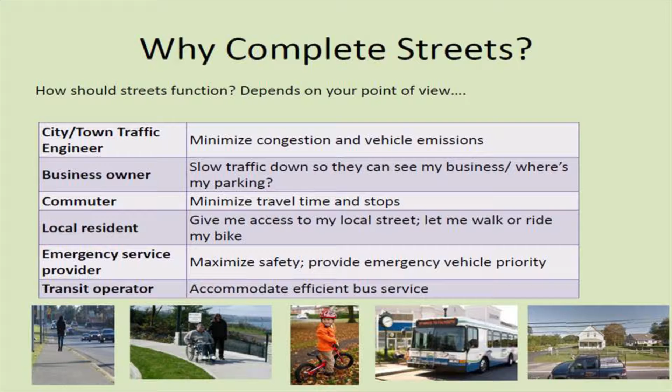We talked about shading and trying to help some residents close to the corridor. If you're a resident on Route 28, you probably want some buffering from the road. If you're a business, you probably don't want that, because you want folks to see your business, know where it is, and come and frequent it. So different users of the right-of-way have different points of view as to what the best use is.

So for pedestrians, we looked at the multimodal paths. We looked at existing sidewalks. Some of you were at the previous hearings where I mentioned that when we had a problem in Teaticket a number of years ago, we went to have the state fix the sidewalk, and they said it's not our responsibility anymore. We said, well, why is that?

Well, because the selectmen way back, when the state said they would build sidewalks from Davis Straits towards the Mashpee town line, assumed responsibility and ownership of the sidewalks. Unusual, but the 3-member full-time Board of Selectmen at the time said, bring the sidewalks, we'll take care of them from here on out. Going forward, we're hoping to look at that relationship with the state as well, to see what the future operation and maintenance of these sidewalks or multimodal paths will be as they're developed and put into place.

For pedestrians, high traffic volumes and speeds intimidate some users. If folks don't feel safe walking down the corridor, they won't walk - they'll find other ways to get from point A to B. Heavy traffic intersections can result in high delays to cross. We've got a couple of big intersections within this area, most notably at the Maravista extension.

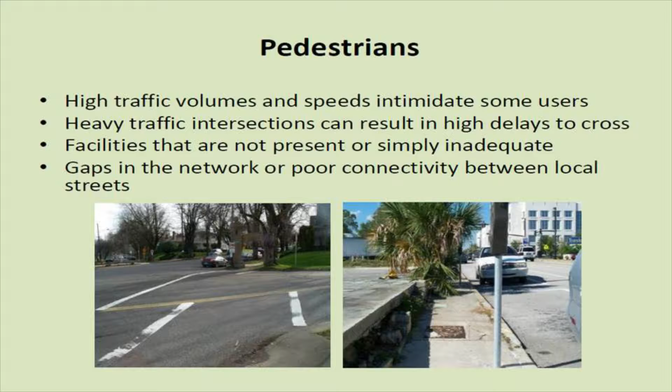Looking at the curb cuts there, for those who have been to that intersection and actually looked at it, when you come in there's one general curb cut for pedestrians coming in two different directions to the corner. If you look at all our other intersections already upgraded in the corridor, we have a curb cut when you're coming from the east and a curb cut when you're coming from the north. For pedestrians on foot trying to make it into the crosswalk, or those in a wheelchair or pushing a stroller, having directional access directly from the sidewalk into the crosswalk is important. So those types of minor upgrades at the corners are important as we look at the intersections going forward.

Gaps in the network, or poor connectivity between local streets - you'll see how this plays out later when we talk about the design. We looked at how this corridor the committee was examining plays into the larger transportation network in East Falmouth and Falmouth as a whole. There's a lot of connectivity points on the south side of Route 28 that bring folks into the 28 corridor and then bring them either to the center of the village or out towards the East Falmouth village.

Not so many connections on the north. There's a lot of residents and businesses, a couple of small developments, but these main connectors of the network are something we had to be cognizant of, and need to continue to be cognizant of moving forward, if we're not looking at this as just a small portion of East Falmouth, but really as a connector piece for all of East Falmouth moving into the center of town.

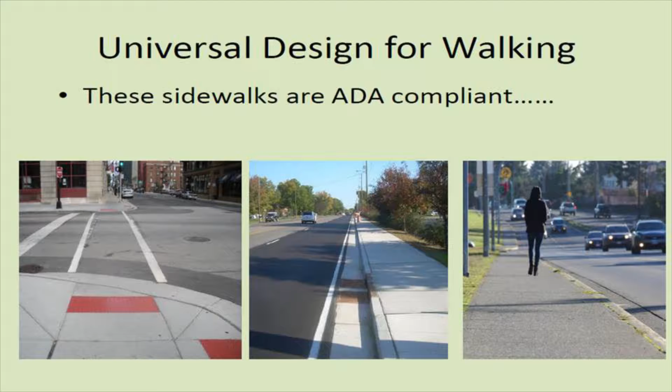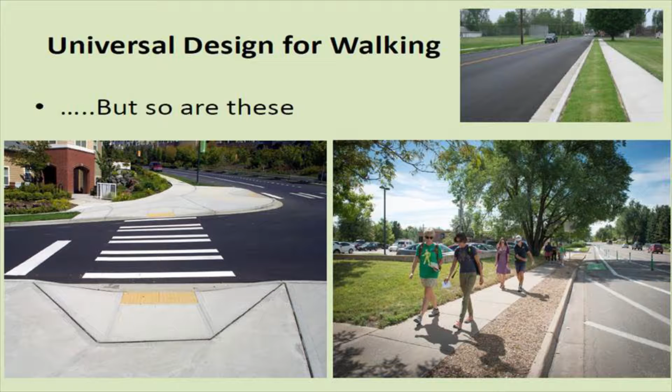On the far right here, compliant sidewalks but with buffer. So when large trucks or vehicles are moving fast down the corridor, pedestrians are more comfortable, particularly young children and folks that might have some mobility issues, being separated and not being directly on the curb of the Route 28 corridor.

So while they're both compliant, what's the better design? Alison, do you want to take over? Sure. So just a little bit of background about why separated lanes, in addition to what Dave just talked about for pedestrians. When you look at some statistics about biking in Massachusetts, 52% of all trips are less than 3 miles, which many people could manage on a bike.

But only 2% of those trips are actually taken by bike. So why is that? Well, among suburban Massachusetts residents, 50% would like to walk or bike to work, but only 1% are comfortable biking with traffic on the road. So there's a big gap between the potential to take cars off the road and turn them into bikes or pedestrians, and the number of people who are actually comfortable doing that under existing conditions.

And among the 50% that would like to bike, only 7%, not that big a jump, are comfortable on a non-separated lane, basically a fog line that gives them a little space at the side of a road but they're still sharing that road with traffic, versus 60% being comfortable on a separated path. So you can see the potential, if we take the bikes and pedestrians off the roadway itself, to really increase the number of people using that and getting them out of their cars.

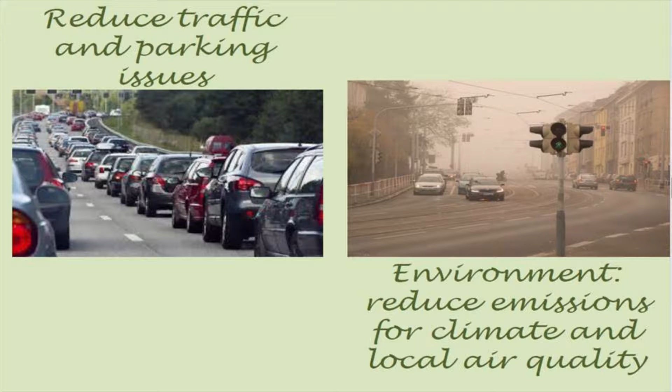Every person on a bike is a person who's not in a car, not in your way, and not taking your parking space. On Cape Cod, especially in the summer, that's a big issue for all of us. Obviously it's a lot less carbon and other pollutants being emitted into the atmosphere. And when you get people out of cars,

walking their dogs, walking with their kids on bikes, it brings it down to a person-to-person level. There tend to be more personal interactions with neighbors and other people, so it can really help build community.

Economically, there are a lot of statistics showing that even if bikers tend to spend less per trip to a store, they take more trips to the store, and so they end up patronizing more than drivers. Providing easy access by bike makes it so you don't even think twice, you're not thinking 'I don't want to deal with the traffic, so I'm not going to bother shopping.'

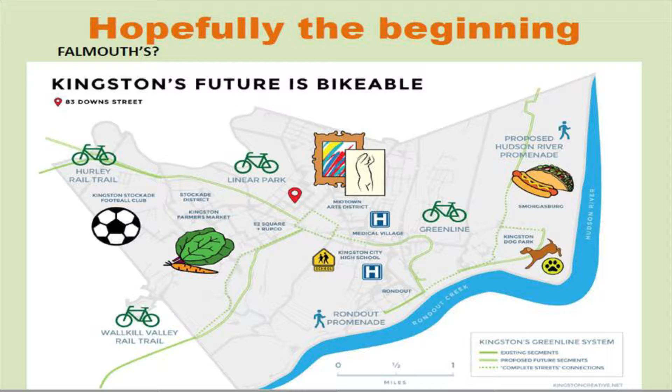So I'm going to hand it back over to Dave here.

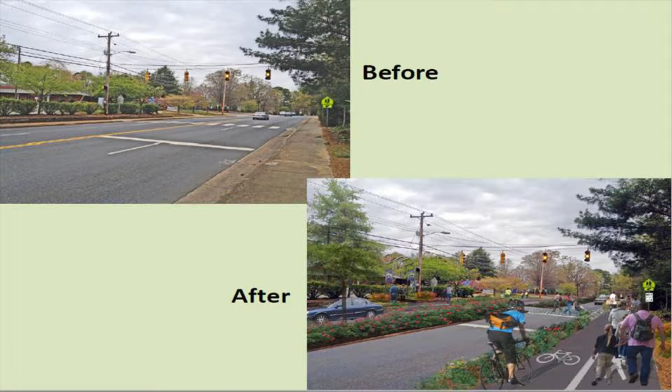Here's another example. You have a pedestrian intersection here. There is a compliant, although probably a little out of repair, sidewalk on the right-hand side. Bottom right, you have a multi-use path, a separated boulevard corridor. And if you look at the crossing itself for pedestrians, where they previously had one long shot to cross, they now have the ability to cross to the center section. So for folks that might take a little time to get across all these 4 lanes of highway, they might go halfway, take a little break, and make the other half.

And when folks feel that they have that ability, and they feel more comfortable and safer, they're more likely to be a pedestrian and make that crossing versus thinking, I'm never going to make it across before that green light goes off and the red light starts flashing. So part of this is about safety, and part of it is about the perception of safety as well, and comfort.

Here's another one of my favorite ones that looks kind of like a familiar streetscape to many of us in Teaticket. Here's a complete streets design that moves the traffic, the pedestrians, and the cyclists. We have protected turning lanes. We don't need a complete travel lane there on the far left, so we got some new trees, some green space.

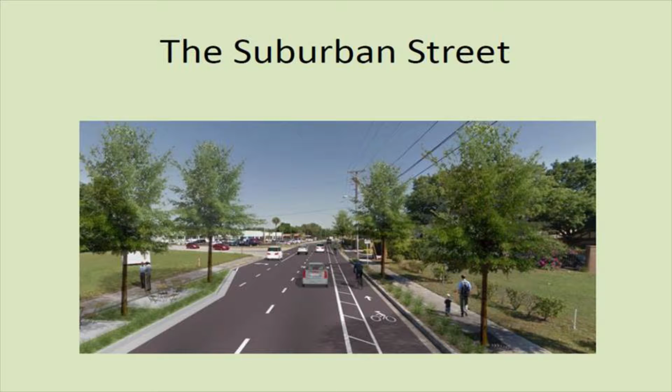Also, not to get too much into the weeds here, but between these two trees, you can see there's some catchment, some basins there. There are ways that we can deal with storm water runoff that can help with the nitrification of our ponds along this corridor, rather than just dumping everything into easements like we have by Teaticket Path, where everything is just thrown into an easement, and then all of that stuff ends up under the road and back out into the little pond.

Transit users — some of you may remember across from Family Foods, we now have the Arthur Ravisa Senior Transit Stop. Doug is here, Doug actually built that. Thank you, Doug, under contract with the Cape Cod Regional Transit Authority. But when we were talking about this corridor, you don't think a lot about public transit necessarily until you are standing in someone's front yard and they're talking about people on their porch in the rain waiting for the bus.

Why is that? Well, because it was raining, and there's a transit stop on 28 in Teaticket, and they were trying to get out of the rain, so they ran up frequently onto folks' front porches. So the opportunity for us to look at this corridor and say where might there be kiosks with a synergy like the one in East Falmouth Village. We have the children's school bus stop out there, the RTA general transportation stop, and students from the charter school also using that RTA stop. So we've got a lot happening at that one little transit stop. This is something we're looking at going forward, to get folks off people's front porches in the rain and figure out the best spots for transit users to access the network.

So our starting point, most of you were at the first hearing. Preliminary designs were two 11-foot travel lanes, 2-foot fog lines on either side, 2-foot buffers on either side of that, and a full 8-foot multi-use path on either side of that. So that's where the dialogue began.

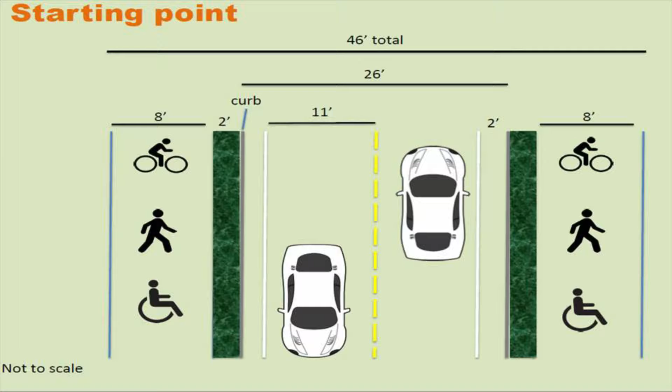So before we go into the actual plan, I want to know if there are any general comments or general questions, and then I'll pull up the other plans. Anything at this point?

Vicky asked: have we been able to get rid of the utility poles that might be in the way? The question was whether we've been able to get rid of the utility poles that were in the way. So the short answer is not easily.

The longer answer is on the south side there were actually very few poles, mostly just support poles that can be moved easily. On the north side, that was one of the constraints that made the path slightly narrower. For the purposes of this plan, we've assumed that the majority on the north side are remaining, but there's still interest on the committee to investigate burying the utilities while we're at it, or at least moving them so they're not right in the middle of the path. They won't be right in the middle of the path, for sure. We've either worked around them or they'll be moved.

Someone noted that 48 poles have to be moved. So I guess there is a lot more movement than I anticipated.

But I would say don't do anything yet - they'll receive guidance from the DPW, is that right, Peter? When we get to that point, they'll receive guidance, but generally it'll be about 8 to 10 feet, maybe a little more off the edge of the road. Because some of those signs have been up for 50 years. And it does cause them a problem because the sign is permitted by the town for that piece of property.

So we can help get the actual plot plans for individual businesses if they want to reach out. We've got them all available, so we can sit down with them. They were just emailed to me this week because they're just completed. So are we online yet with these? We are not, not yet. We'll have them on the website at some point, we'll pop them up there, but they're available for town - there's no rush to review the signs.

Representative, I have just a follow-up question for you. You mentioned the status of that memo from the 50s that says the state is not responsible for maintaining the sidewalks. I'm looking at this, and I think it's a good plan so far, but we're tripling or maybe quadrupling the amount of space that needs to be plowed or sanded or taken care of just in terms of the actual walkways. Who's going to do it? How much extra is it going to cost?

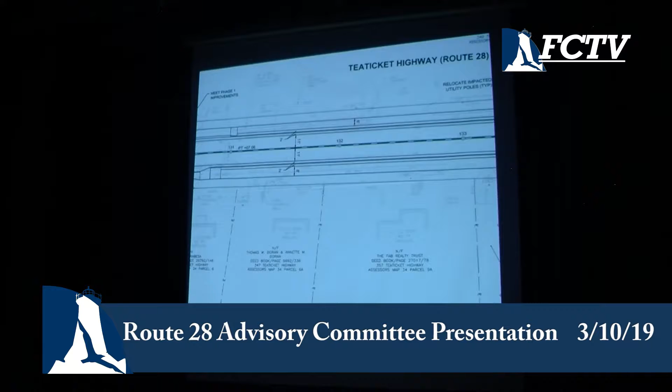So we want to scroll through here, start looking. The preliminary design, again, starting over by the Teaticket school administration building. I was going to call it the elementary school, but it's not that anymore. That's where my dad went to elementary school.

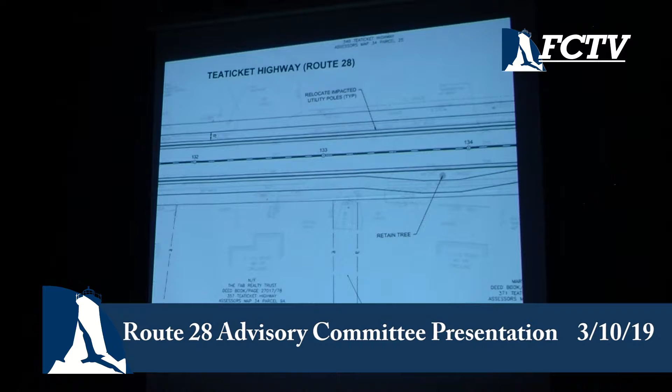So we got the 6-foot corridor, and what happened there was, when we got out there, we walked and looked at how tight that was and how close the residents were in many of those areas. We needed to do as much constricting as possible. With a 6-foot path, we made the preferred connector on the south side the 8-foot path. So if you're riding a bicycle trying to get to the center of town, you come into where the Maravista extension is, and you have the opportunity at a signalized crossing to go to the south side, get on the 8-foot multimodal path, and continue through the corridor into the village of Teaticket and into the center of town. Then being able to continue to have pedestrian traffic on the north side as tight as possible, where we could still get the state to sign off on the fact that we were upgrading and trying to continue to have some type of foot traffic on the north side.

That's not to say folks are going to stay on their bike all the way through—that very well could happen. But the idea is to try to direct them to the areas where they have these signalized crossings and have a safer way to get to the primary path within that corridor, which would be on the south side.

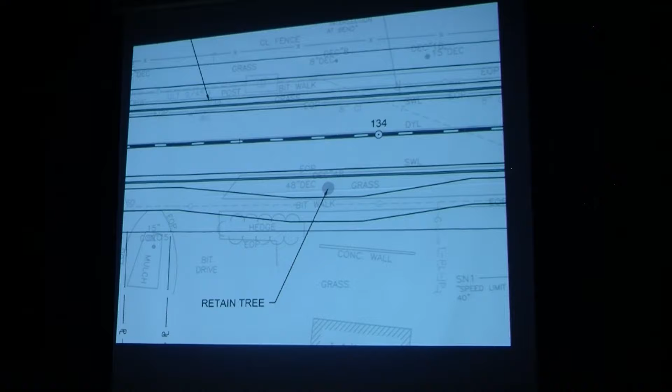So we give you an example here, like retain tree, right? We literally went out and marked the tree. The DPW went out and marked the trees beforehand. We went out and looked at the trees, and then we went out there with the tape measures measuring how much these paths would encroach. So here, instead of just being a 2-foot buffer coming right through and wiping out one of these old historic trees, the engineers have gone through the grading requirements of Mass DOT, and we're very slowly meandering this path around the back, creating a slightly larger buffer zone, and going to preserve one of the trees that is actually worth preserving. There's some rotten trees out there that aren't.

Let's see how the transition goes.

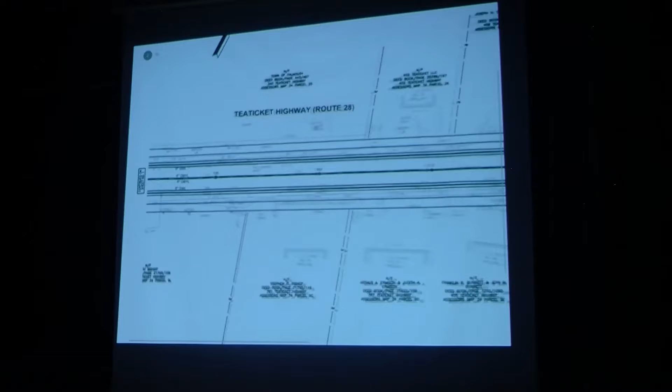Now, I know folks in the room live in various areas across here. If you want me to stop and zoom in on a particular area, we can have some questions answered as well.

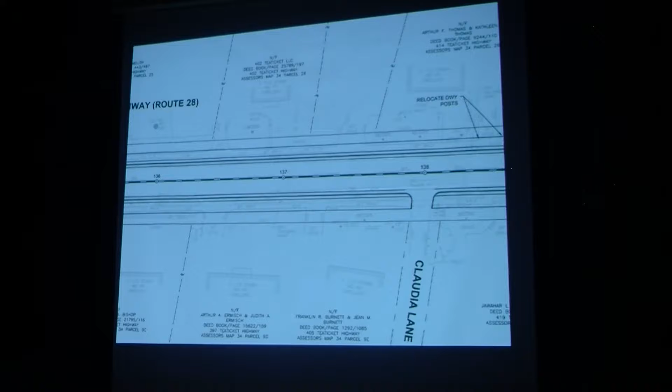At the very beginning, back the other way, across the first entrance—at the Teaticket School? I mean at the administration building? Yeah. I'm across from there at 347, and I just measured before I came out here, compared to my property, it's 11 feet from the curb. How does that affect that?

Okay, so here's your front yard right here. You've got some boulders on the right-hand side, you have a concrete retaining wall, is that correct? So if you look up at the 8-foot—let me get the laser pointer. So right here would be the 8-foot multimodal path. That's an existing hydrant right there, correct? I'll look at the engineers because I'm not an engineer. So that's the hydrant in the corner of your property there. Yes, and then there's the 2-foot vegetated buffer, that's the 2-foot between the fog line and the edge of the curb. So let's see, here's your driveway right here. What is this, EOP?

Edge of pavement, okay, so there's the edge of pavement in your driveway. That's the preliminary design concept right there. The path would end basically where your driveway pavement splays out currently. And the sidewalk—it doesn't intend to come into my property?

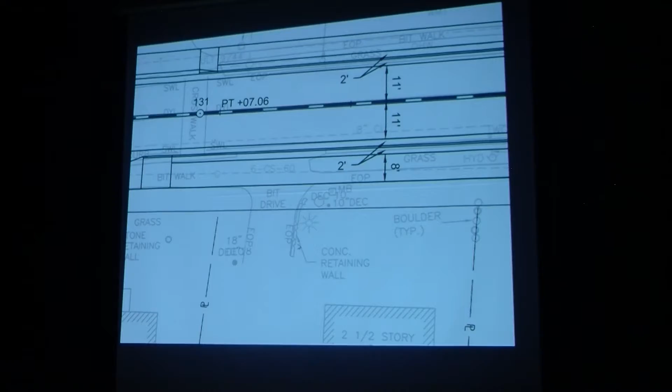Right, yeah. What was interesting for us, particularly in some front yards where neighbors met us, is when we actually got to this level of pulling out the tape measure and looking at the trees, some folks ended up with an extra foot or two of grass in their front yard than they did from the original general concept design. So here we are thinking, oh boy, here we are taking people's front yards—how much of the front yard are we going to take? In some of these areas, we're just redesigning what's in your front yard, where the sidewalk is now, and now you've got a little green buffer, and you're going to have that 8-foot thing. In other cases, you might end up with an extra 6, 8, 10 inches of yard, and in some cases you might lose 6, 8, or 10 inches. But yeah, that's the current preliminary design for your front yard.

Craig Howard again. Was there any conversation about decreasing the speed limit, just before the school? There's only one way that we can decrease or change speed limits, and that's under Chapter 90 of the Massachusetts General Laws. That requires that a speed survey be done by the Department of Transportation. Under the current regulatory environment, unfortunately, there's an 85% target of the survey that's done, and that sets the speed limit. In most areas where I've had constituents ask me to bring MassDOT in to do these speed surveys, they've raised the speed limit.

So we can't just set a speed limit based on what we think it should be. There's this bureaucratic thing that we've been trying to change, and the city of Boston got a little carve-out for some of the alleyways, but you have to actually go through this survey, and in many cases you end up upping the speed limits rather than lowering them. So we can't arbitrarily set that. However, what we can do is create environmental designs which end up slowing down and calming the movement of traffic. In that case, if we find that to be successful, we could do a speed survey and maybe it would set the new speed limit.

Another example here, returning to the example of how we went around the tree. And here's another one, after Claudia Lane again.

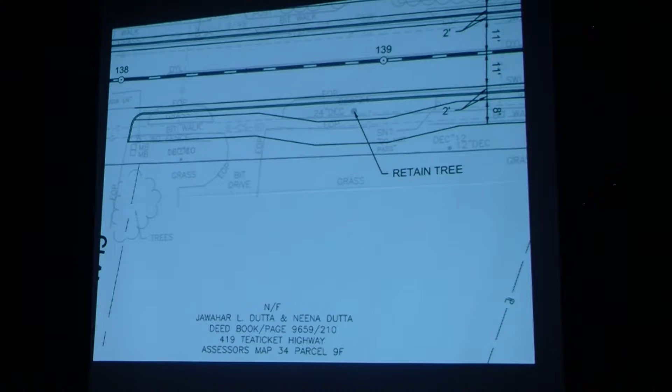Again, yeah, it's my house. Okay, so I'm just trying to visualize, because my driveway—I think that's the bit drive, is the indication for the driveway? Right here? Yep, edge of pavement is here, to the left side of the grass. So I'm just trying to figure out, that line where it says grass, is that my actual front yard? What I'm trying to visualize is, is my yard going to be pushed back a little and then out again, so it's like a dip of a curve, instead of how you walk right now, where everybody's got kind of a straight arc—nothing's going in and out.

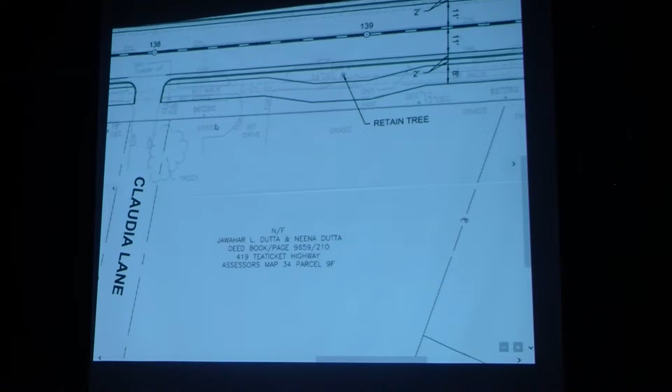Let me just clarify a couple things to make reading the plan easier, because most of us are not engineers. The gray, faded out areas are existing conditions. So whatever you see over what it says grass, that's what you've got now in your yard.

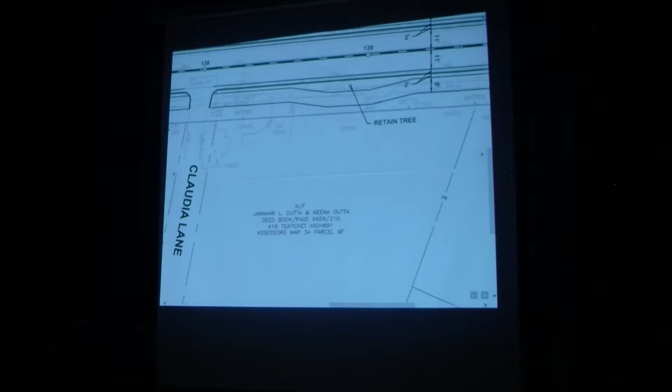And then the series of lines, let me see if I can do this with a mouse. I know Dave explained this already, but this is the edge of the roadway: 11-foot travel lanes, then a 2-foot fog line area, then a raised curb, then a 2-foot buffer, then the 8-foot multi-use path, and then this line that goes all along here is the edge of the state right-of-way, but we're not coming that far. The darkest black line here is the 8-foot path that we're actually doing. This is just to show you where the right-of-way is that we're not using all of. Does that help at all?

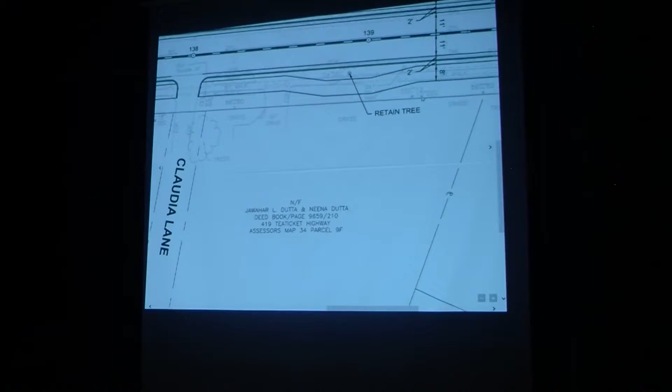It does, okay. I was just trying to figure out... Yeah, anyway, so none of us are engineers, and we're putting all these together.

Do you like that tree in the front yard, though? Is it all right if we keep that tree? I love the tree. Okay, good. Yeah, we try to keep that tree, if we can. I'm here for the tree.

David raised an issue when he was talking about traffic quieting, and I was wondering, trees would do that, but is there any place where the layout is suitable for traffic quieting? Some of the pictures you showed had plantings in the middle between the two lanes. Is there any way to design that into that stretch of road? So you're talking about like the boulevard where they have the separated lanes? Yeah, it wouldn't be the whole thing, but there might be some parts where you could do that.

At this point, we hadn't recommended any of that type of traffic calming device, because it can work really well, and if you travel around to different places you can see how they've quieted traffic with some of these. But it's a balance again. We want to slow them down enough for folks to be comfortable on the corridor, but we want them to go quick enough to get where they need to go so they don't avoid using the corridor, particularly for our businesses on the corridor.

I love the design, and I like the conversation about how we can use the design to slow down traffic. One thing I notice, especially if we're going to have a lot more people walking, biking, handicapped people on this road, and this might not be this committee's job, how are we going to redirect the rigs, the 18-wheelers that are traveling down this road, or can we? There are other routes they probably could use that are more efficient, but they use this one a lot. If we're making it for public transit, we probably don't want 18-wheelers going up and down the road.

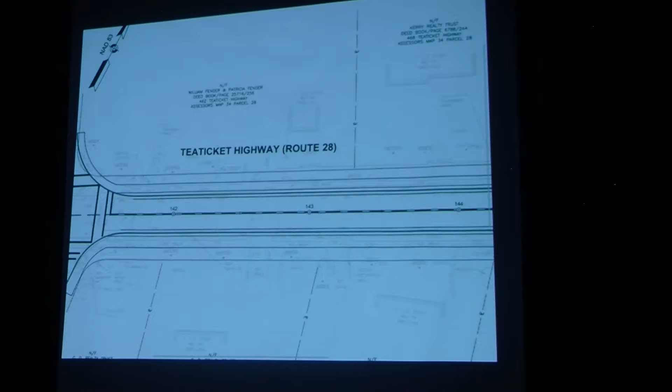Is there no left lane? No additional turn lanes in the design.

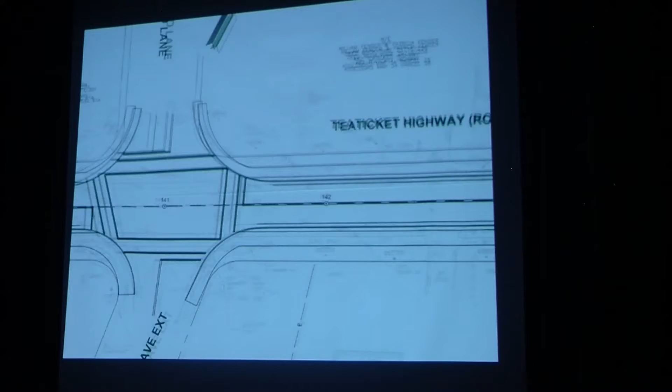On the Maravista Avenue extension, it's not clear from the drawing, although I think it could be, that people coming from the west or north turning onto the extension are really going in a different direction than a straight turn, so they're free to come across the line, or people waiting to cross over Homestead Lane.

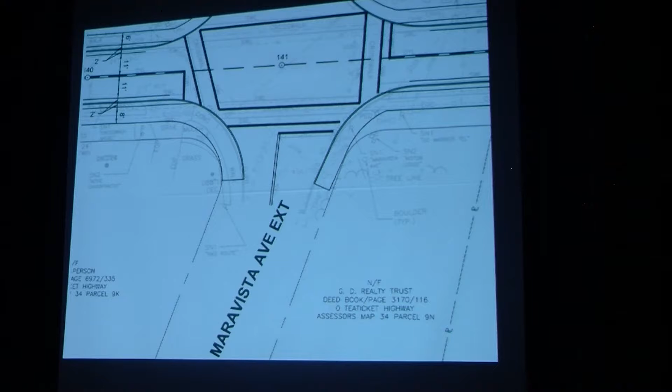So you're talking about traffic coming west and then south, down in there, and people coming south turn and also cut across into the lane. Any improvement that could be made there to widen the Maravista Avenue extension at that corner would be very helpful.

Pedestrians, not that there are many there this time, nonetheless have to be very careful and adjust. It's not an easy corner to navigate coming off of 28 from other directions down onto this avenue extension. I don't know if it's noticed, but the way the road is constructed, it isn't quite an easy left turn.

There's concern about traffic coming here, turning down and cutting the edge. Also, because of the way the corner is configured, if you notice from the right, you're not making a square corner, you're actually hitting more than it might seem.

From my understanding, that intersection, other than some massaging of the sidewalks, is not going to get changed. So our charge is from the intersection either way.

One of the things we talked about was the curb cutting, bringing that in as we saw in the Complete Streets designs. Some of those corners are squared off for pedestrians to decrease the crossing distance, but that also calms the traffic at the corner, because now traffic has to come through whatever structural planting is happening where the corners are.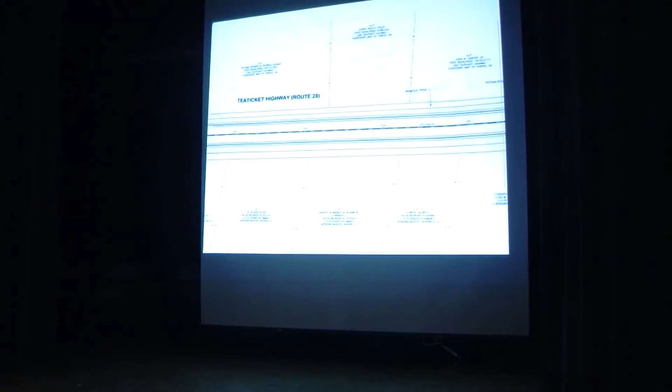Here we go. We've got a tree there that we're going to remove. That one wasn't in such good condition.

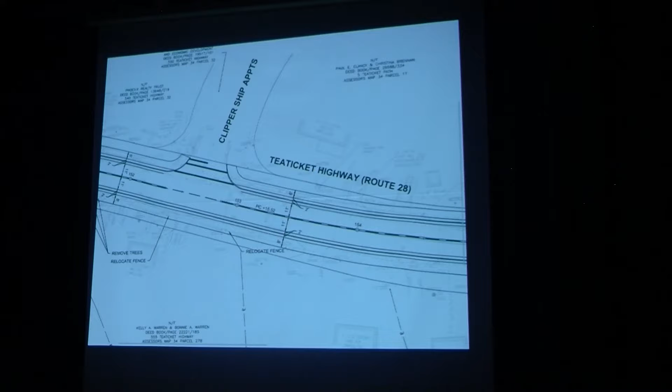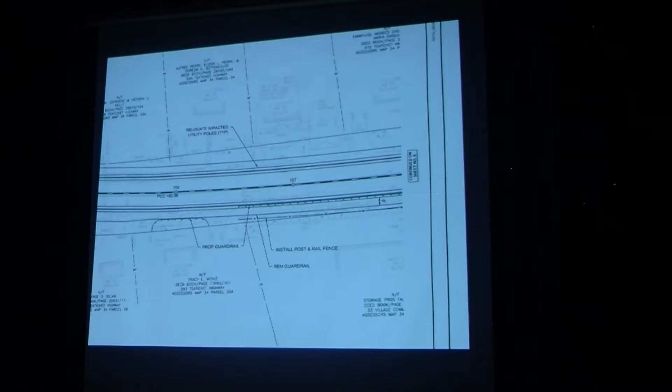There's an area with existing guardrails, and we talked about the types of fixes for the guardrails, and actually potentially installing what would be a fence with a guardrail behind it, so that it would look more like a fence than a guardrail.

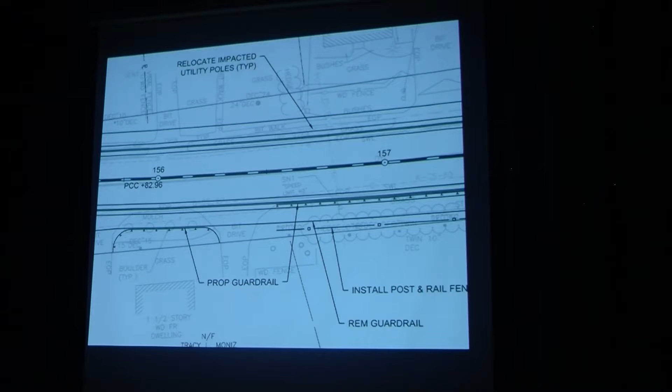So this area where the guardrail is, just before you go down the hill towards Falmouth Lumberyard on the left, but on the right-hand side, over by the Domino's Pizza, in the storage facility back there, there's a guardrail. We talked about how to extend the safety benefits of the guardrail and separate the path. It's a very tight area where that hill comes down, so there would need to be some fill, and we're looking to separate the path.

Right now it's a steel guardrail, you can see the pre-existing condition here. We're talking about a post rail fence instead.

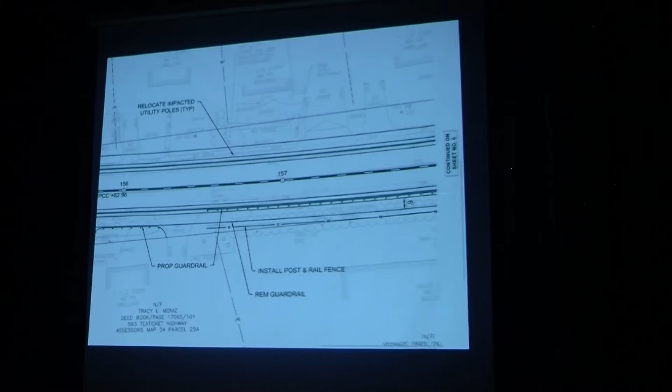This was one of the areas where the neighbors were with us in the front yard with tape measures, talking about how this extension could happen from the existing guardrail structure through the front yard. This is also one of the houses where folks were waiting in the rain, so there's an opportunity for some type of transit locale for people getting on the bus. In that area there are some big boulders in the front yard because vehicles have crossed into the house through the front yard. Having this guardrail as a physical divider allows the property owner to make sure those cars don't end up in the house again.

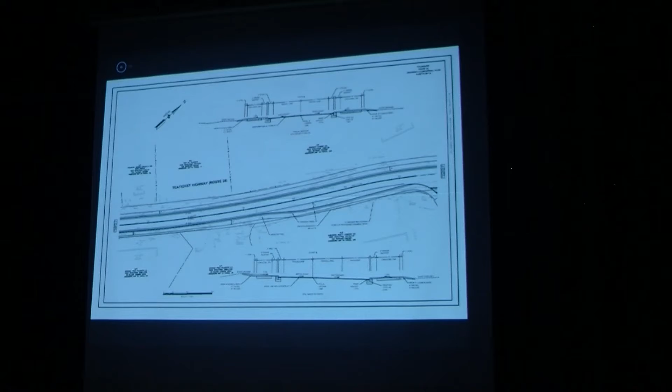Again, we're still 6 foot on the north, coming through the corridor of the Falmouth Lumberyard. This was an interesting learning experience for many of us. This lane, which appeared to be just a turning lane for folks to get into Aubuchon Hardware, was designed for much more than that. Mr. Augusta years ago worked with the state on staging issues relative to vehicles, the large delivery trucks coming into the lumberyard. So we're continuing to look at that area to figure out the best way to have safe movement of that traffic and the trucks, making sure that as they cross whatever multi-use path we have, we limit interaction with cyclists and pedestrians as much as possible, so it's safer for folks on foot, on bike, and for those in the trucks making deliveries.

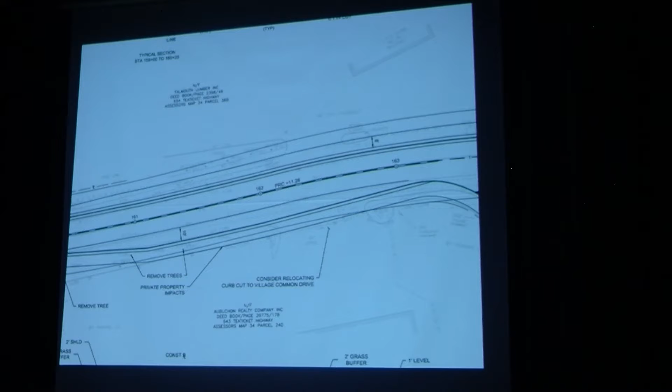Could you zoom into where the entrance is to Falmouth Lumber, so I can see if there's any concern with the curb cuts? Yeah, so there's no changing of any of the curb cut area. The setback of the 2-foot buffer off of the fog line here shows that 8-foot path would begin on the opposite side of your entrance to the lumberyard, and then the 8-foot path would continue off towards East Falmouth.

So we're showing a potential... the little island, I believe, is there. There's a telephone pole right in the middle. Yeah, right there, it's a utility pole, 9-6 something. Where's that going to go? That's one of the 40-some-odd poles. Where's that one's going? It's going there.

Can we get a little more detail - is it going to go back further onto the property? I don't know, we haven't looked at all the specifics yet, but there are a number that are going to have to move out of the path, one direction or the other. There's a pole right in that little island. Yeah, so it's right there in the island.

Maybe you want to keep it in the island and just move it off the corner, or move the whole island? Well, is it not going to interfere with the 8-foot path? Right now it's actually on the edge of the design layout of the 8-foot path. So we need to have a setback - is it 2 foot, Ray? 2 foot? 3 foot, okay. So they want 3 foot from the edge of a pathway to a structure like a utility pole. So a potential 3-foot setback would bring it to the northern edge of what is now your little island there. So that's something to consider, obviously.

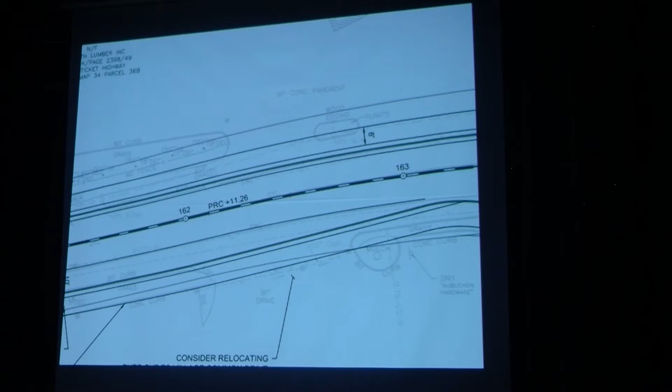So that starts the 8-foot path on the north side.

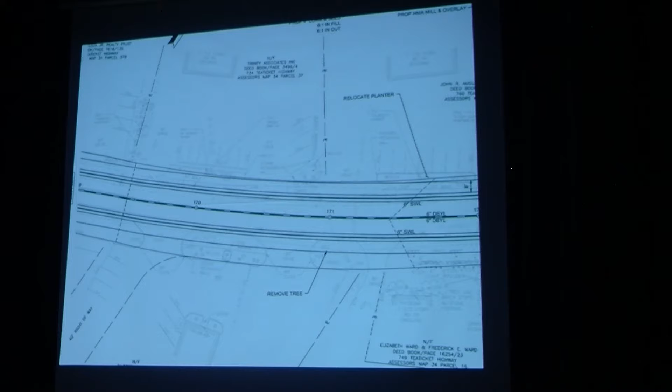Here was an area of concern on the initial plans too, where we had parking right up along the edge. Now we're able to put that 8-foot path on the north side and still be outside the front edge of what's called East End Tap, used to be J.R. Brody's. Instead of going all the way into the parking lot, they're able to retain the same amount of parking, and we're still able to squeeze in our 8-foot northern side path.

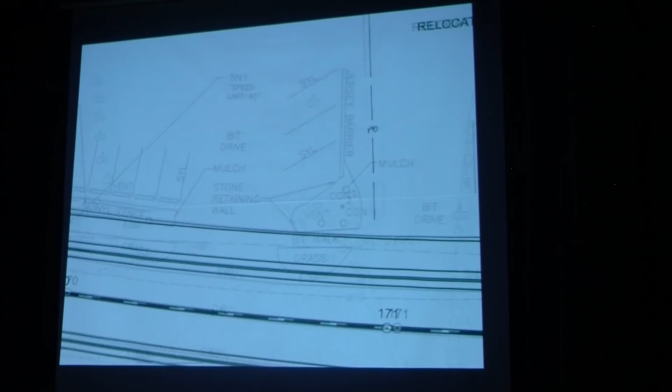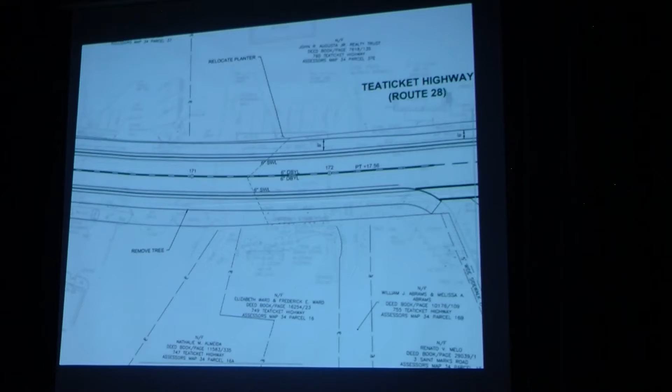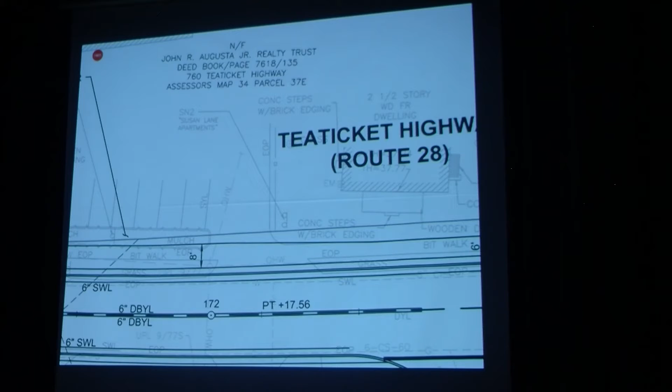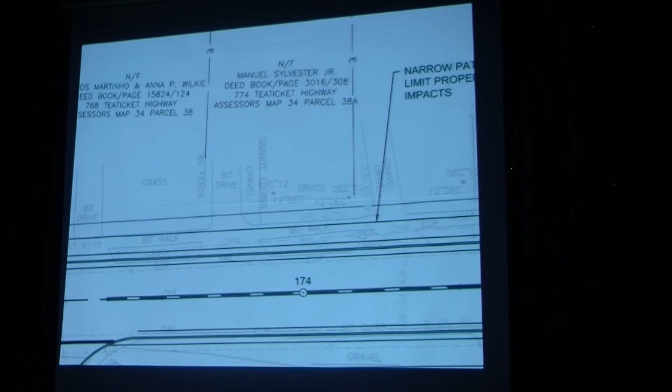Would you mind zeroing in on 768 Teaticket Highway and the house and apartment building on the corner of Susan Lane? 768... 760, right there, it's Carlos Martinho, now owned by John Augusta. Right on the left of the street. If you wouldn't mind moving it more to the lot before on the left, yes, the corner of Susan Lane, the apartment building there.

That front porch, yes. So here we are, look at this, we went back to 6 here because this is really tight, as you know. So this northern line here would be the layout, the state right-of-way layout. This would be the path.

We actually looked at this area as to whether or not to shift the road south within the existing layout to gain the space here. When we looked at actually shifting the road to gain the 2 feet, it was easier for us to design a 6-foot path rather than try to shift the center line of Route 28 two feet south to get the extra 2 feet. So we're suggesting we cut back to 6 feet rather than 8 feet in this area to get through this little section, so we don't have to shift the center line of the road, and we'll retain the front.

So what's the distance after the 6-foot mark? Where it says wooden deck, is that a solid line? Is that the actual road layout? No, that's the right of way. The top line is the road layout, the road right-of-way there, yeah. I don't have an exact number, but I'd say it's probably about 3 feet. About 3 feet, yep.

I'm just missing something, because I'm confused. These homes, I know for a fact, 768 was built in 1924, which was before the layout of Route 28, and so the property lines... I'm just confused regarding you saying the state layout. So the Commonwealth of Massachusetts has a legal right-of-way up to this line in East Falmouth, and has for my lifetime. I don't know exactly when the current layout was done. What was it, 1928? So for my generation and my parents' generation, the state has had legal right-of-way up to that point on this corridor. So the home built at 768 in 1924, when they took the land at that point, the layout?

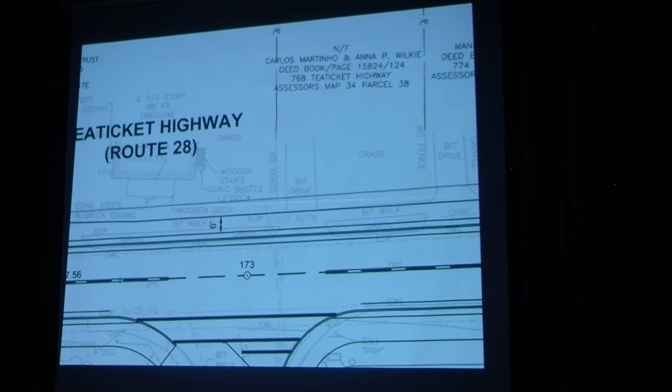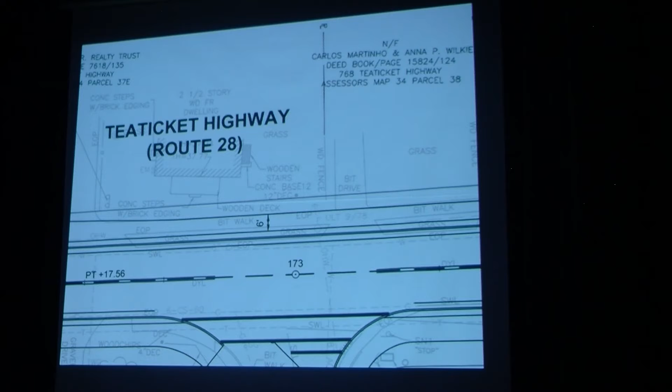I think what's confusing... you're talking about this structure or the structure next to it? This structure, I'm not sure, the one right there. Because there was a lot of concern about this, and it's not even on the map, it's so far back. We had a lot of people worried about this house, and it's so far back that the structure doesn't even make it onto our map, so it's way outside of the layout. But I just know for a fact where the boundaries are for that particular house, because my son just bought it less than a year ago. And the structure is way outside of the right-of-way.

Okay, so this is it, this is the driveway right here. And you can see the edge of pavement already on the existing sidewalk. So we are taking a 6-foot multi-use path, laying it over what is the existing sidewalk. Legally, the Commonwealth still has access between the edge of that path and that line, and we're not doing anything with the rest of that property.

So what's confusing a lot of people, I believe, is after the 6-foot mark, the rest of the property that still lies at the edge of the highway is not going to be used. It's going to continue being part of your property. Absolutely, doesn't change at all. There's still a legal easement on it, but that's your property. So we left it as is.

We could have come in another 8 feet and put a 2-foot buffer, but we didn't. What we did is go right along with the existing sidewalk. This is where it gets so exciting for me, having been to the first couple of meetings to see what was happening with the plan, to get to the point where we're saying, wait a minute, you mean I'm actually going to be able to keep that 2 to 3 feet?

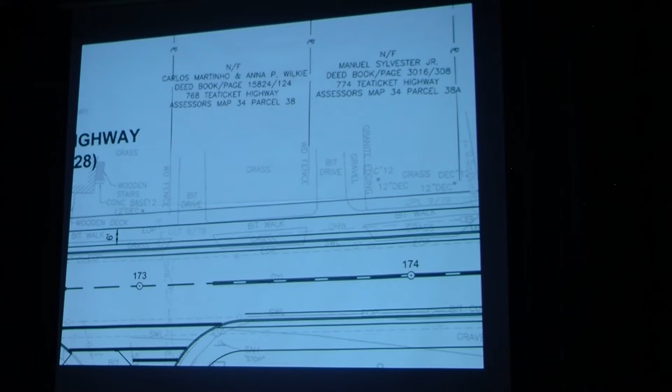Absolutely. And the pavement's right there now, all that broken pavement. This is going to be the new clean 6-foot path right there. Okay, thank you. It's amazing what you can do when you get these little pads, get right in there, make some decisions, and look at hyper-sensitive details. So good, I'm glad we could answer that question. Anything else on this area?

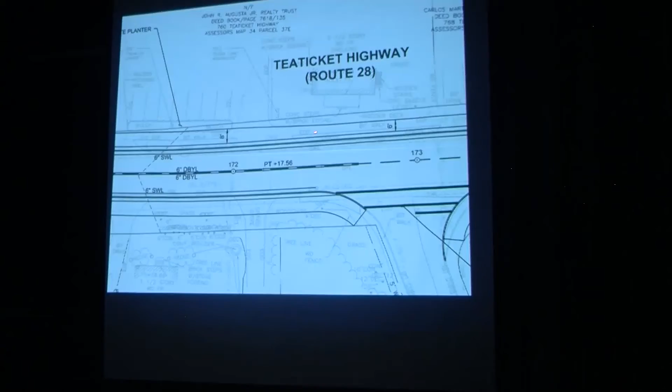Yes sir, hi Dave, Paul Pendleton, East End Path. Come back one second. You have the 6-foot pathway just east, and then down at Falmouth Lumber, also 6 foot.

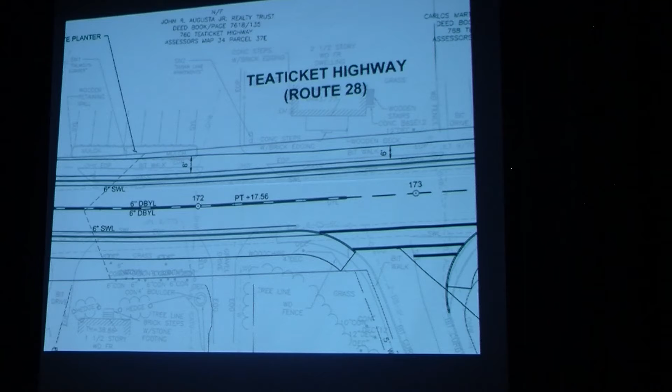I appreciate from the original plans what has gone on here, it hasn't taken any of the parking, which would have been a problem. But I'm curious, I have a sign which is important to the business located right there. I know you might not have the answer to this, but I don't want to lose additional parking to have to move that sign back.

My question is, is there a thought that you could just continue the 6-foot pathway between the edge of pavement... I don't know if you can see it there, it's the vinyl fence. Where's the sign? SN1? Yeah, your sign's outside of the right of way, so that'll be allowed to remain that close. That's your sign, you can keep it there.

Well, the post goes up, the sign feels like it might be over the walkway. We kind of looked at that planter too, so we didn't have to relocate it. That whole planter's outside, where the vinyl fence is. Well, fantastic, again I appreciate this plan compared to what I saw originally. You're concerned that the actual width of the sign itself might encroach onto the walkway? Yeah, that was my concern. That's the plan we have.

And being asked to move it back into the lot, which... where it says vinyl fence? Yeah, right there, green, vinyl. So we might have to work a few inches on the sign placement, but it would be outside of the path definitely. Even currently, the main structure anchored there is outside of the right-of-way itself. So we might have to do something for a couple of inches, I don't know, but I'll have to go back and look, I didn't see. So it overhangs, I'll make a note of it.

Okay, so that's... yeah, but we did, when we got there, we looked at that and went through it, as Jim was just mentioning. We were looking at the planter and everything, and how do we get through here?

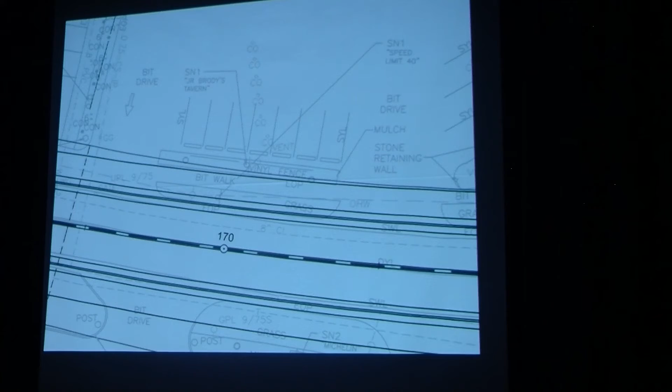I just wanted to bring that up because not many people know where the King Philip Ravine is, and it is a historical site. All right, what did he ask? About a King Philip historical site layout behind the businesses in that strip.

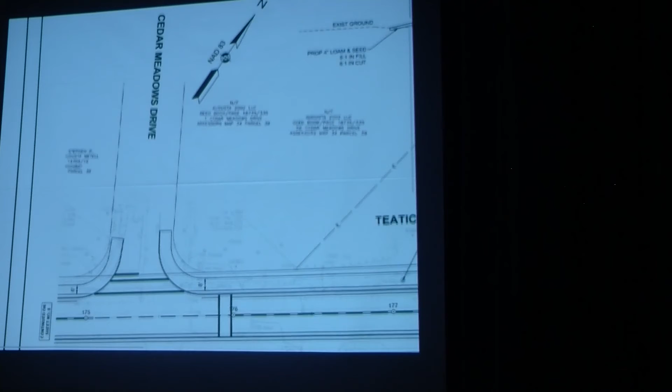So we've got one more section here, and then we'll be able to go to... actually, I guess there's 2 more sections. And then we'll be able to go to the prints across the hall that you can write your comments on. So what do we got here? This is Cedar Meadows Drive. So we've got 6 feet coming in, and 8 feet to the east.

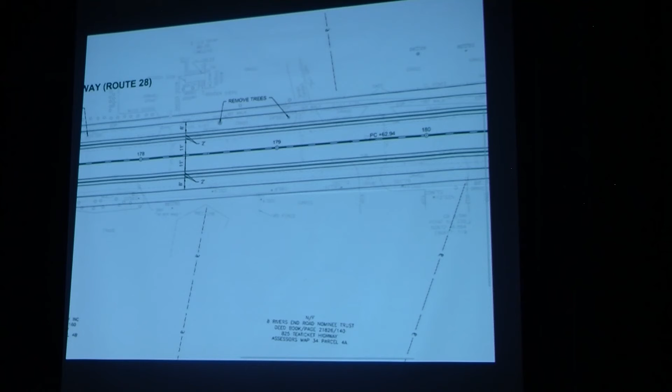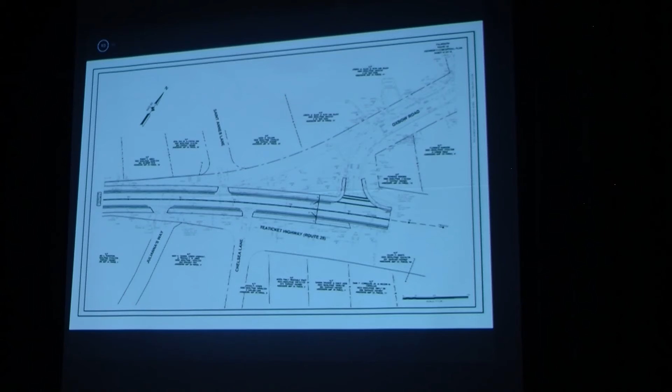And then this brings us down to the Oxbow Road, which was the end of the section of the charge of the committee. One of the things that I noticed standing at the top of the hill at the end of the day...

I want to give a quick shout out to Sheriff Cummings, who during our site visit donated a van for us to be able to get transported along the corridor. But he also came and ended up being the driver himself. So we had a little celebrity driver, and he was with us for the afternoon.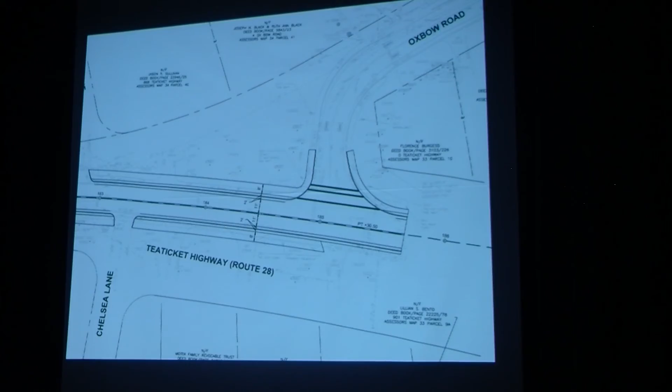But when we got there and got ready to start heading back towards the school administration building on the north side, we looked down and pretty much saw no houses or structures along the south side of what would be this 8-foot path. And I looked down and I see the Raleigh-Costa Bridge going over the Coonamessett River, and I think, gee, just on the other side of that street begins the new Coonamessett River Greenway corridor.

Wouldn't it be nice, as an additional discussion our community could have, to take that multi-use path and just go down to the bottom of the hill and have a signalized connection where the children from Teaticket and this elementary school could have a safe means of transport to get to the Greenway, to use that resource for educational and recreational purposes, and then for us to continue to work for the children in East Falmouth to get them from the East Falmouth Elementary School back to that corridor.

So that was just something that went on in my mind when I stood at the top of the hill and looked down and said, gee, I know we're supposed to stop here, but if we just go a little bit further, we can connect this whole resource to the village. That's the John Parker Road intersection.

I would certainly say keep that thought, because my question is, what does the ending look like? One of the worst things is to suddenly be transitioned into a non-protected riding area, particularly at that point on 28. I'm going to have to defer to the Department of Public Works on that.